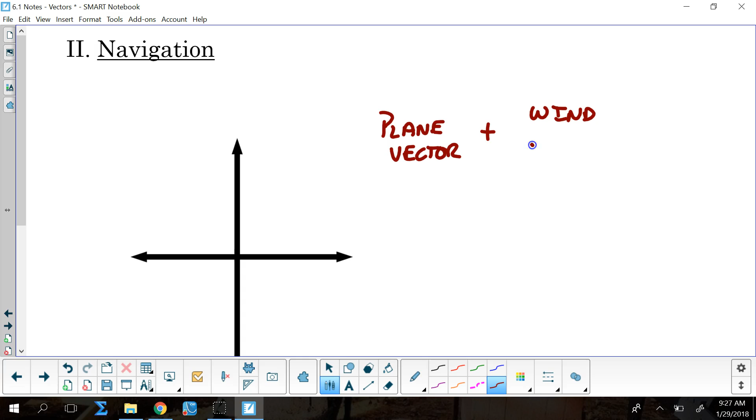Either way, in terms of vectors, the plane's vector plus the wind vector is going to equal my actual vector. So whatever the plane is doing plus whatever the wind is doing is going to give me what's actually going on.

And sometimes, like you guys were coming at a perpendicular wind, so it was pushing me off. What if the wind is from behind? It'll push me straight, but it'll make me go faster. If it's called a headwind, if I'm heading directly into the wind, that's going to slow me down. If it's from the other side, front or back, it could speed me up, it could slow me down, and knock me off course a little bit. But no matter what, we get that.

Now, remember, vectors are magnitude times the cosine of the direction, and magnitude times the sine of the direction, right? Okay, so that's one thing we've got to remember, because we're going to say the plane is heading in this direction at this speed. Magnitude is speed.

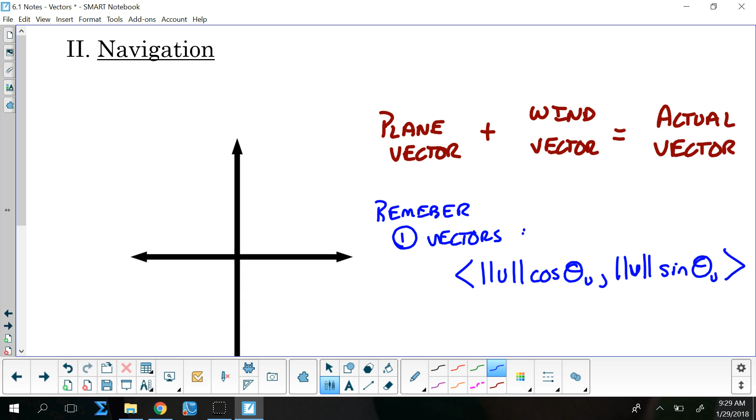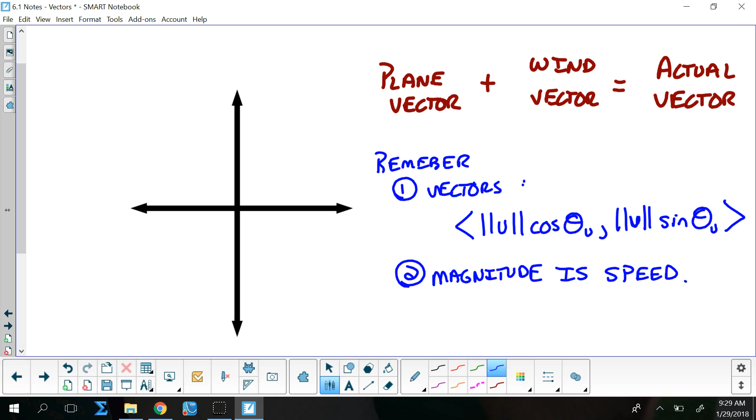Okay, so we're going to have to find vectors. Here's the downfall with the finding vectors part, in directions.

We'll put directions in red. North is 0 degrees, right? East is how many degrees? 90 degrees. South is 180 degrees, and west is 270 degrees.

Now that's direction. What about trig? What's east in trig angles? 0. What's north in trig angles? That one's 90, right? What's west in trig angles? That's 180. And what's south in trig?

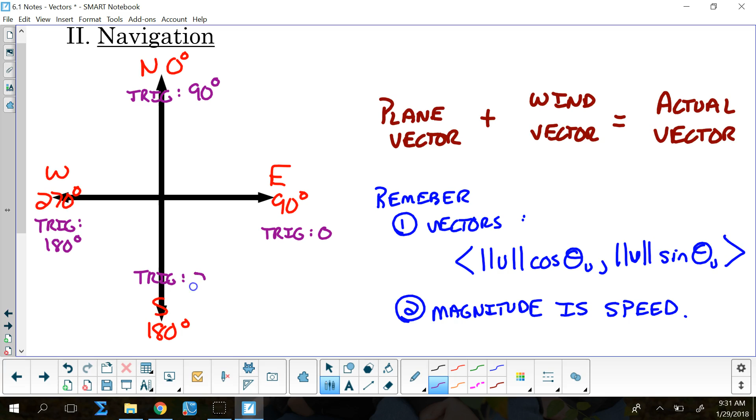That's 270. Do you see the problem? Why is that an issue that I brought forth? Why is that going to be an issue? Because you're using trig functions. Because I'm using trig functions.

So to find my vectors, these are trig angles. If I'm going to use magnitude times the cosine and magnitude times the sine, those have to be in trig angles. So it's like the song we played before school today, the homeroom walk-up song.

It's the circle of life. So we're going to start with a bearing or a direction angle. We're going to switch it over first into a trig angle. Then we're going to find our vectors in trig. Then from that, we're going to find the things that we need. And what we need is a direction in the end, so we're going to come back to a direction angle. It's a lot of logic, but you can handle it.

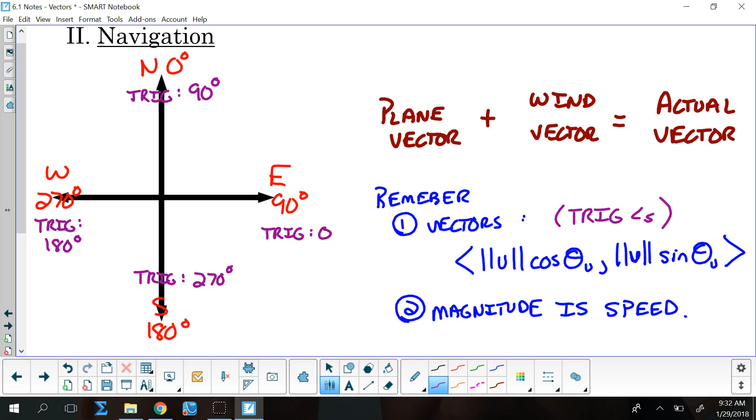So that's the couple of things we have to remember. Let's talk here about a plane flying at an airspeed of 450 miles an hour, bearing 150 degrees. The wind is blowing at a bearing of 60 degrees at a velocity of 50 miles per hour. What is the true course and ground speed of the plane?

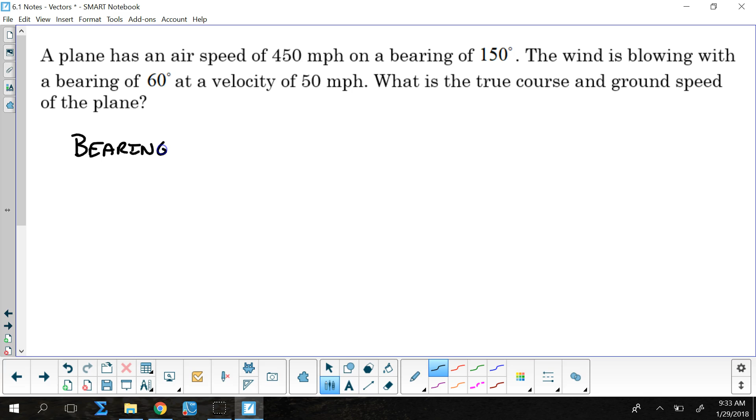Okay, so there it is. So let's first talk bearing. Let's talk the bearing of the plane and of the wind.

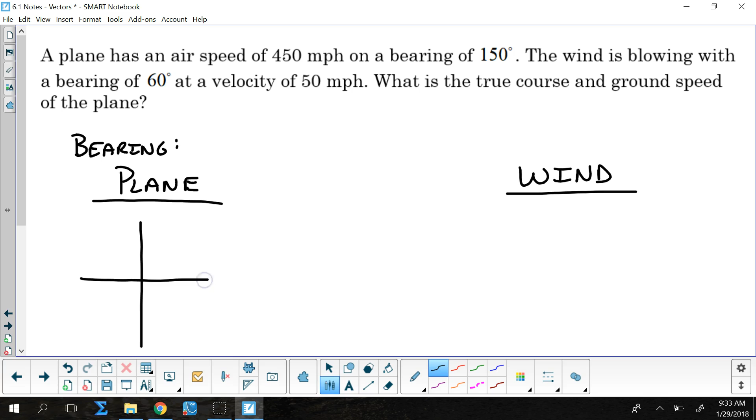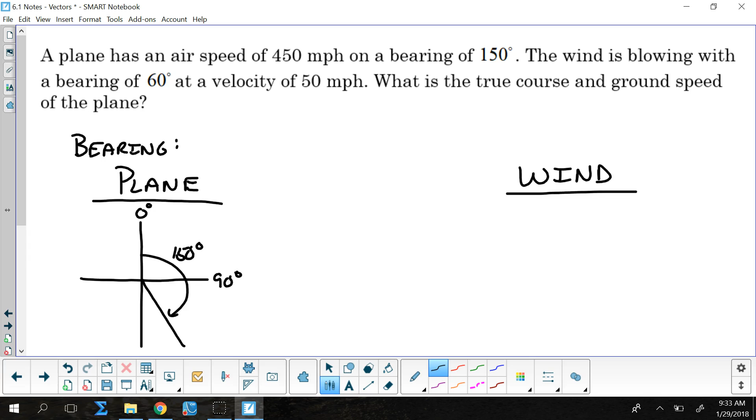So the plane has an airspeed of 450 miles an hour and a bearing of 150. Well, 0 degrees is here, 90 degrees is there, so that would put me at 150 degrees right there, correct? Yes? Okay, what is that in terms of trig?

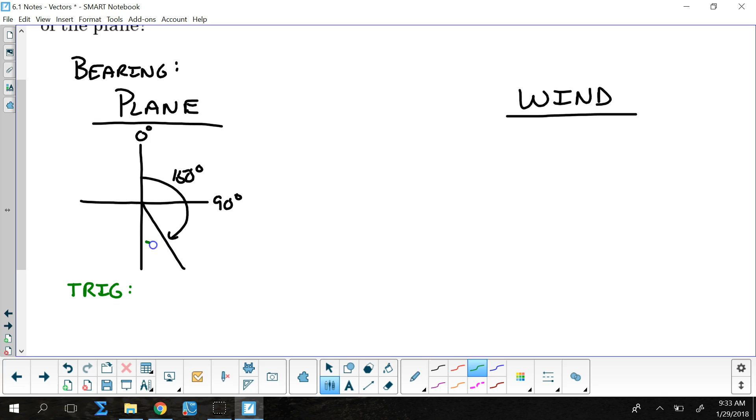That's 150. That's 30. So my trig angle would be how much? Here's 90. Here's 180. Here's 270. I got to go 30 more. So my trig angle is 300 degrees.

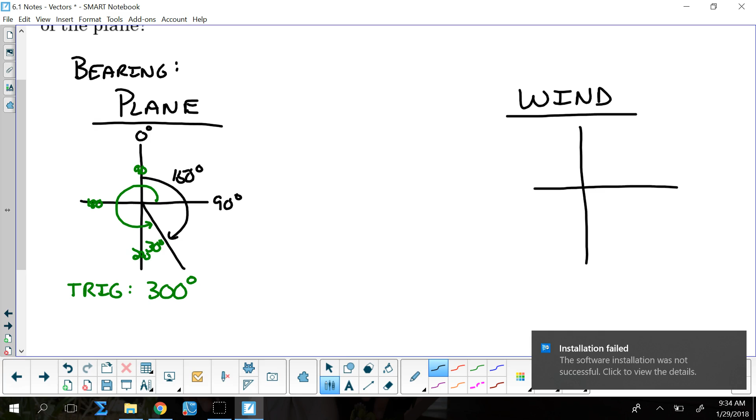Hey now. Okay, then, now we go over to our wind. And our wind is bearing 60 degrees, correct? So that means it is going here.

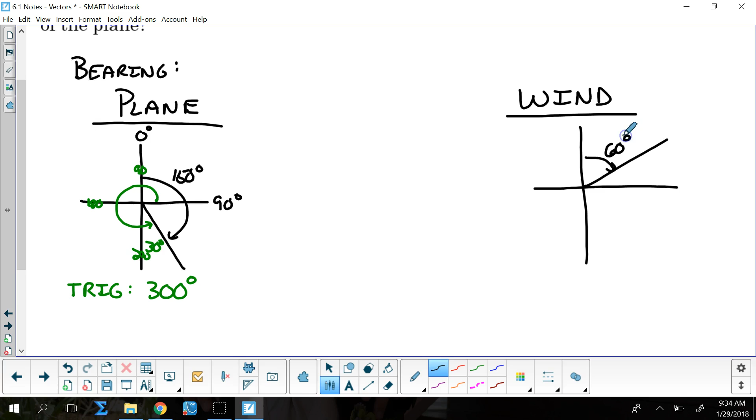What is my trig angle? What is my trig angle? 30 degrees. Does everybody understand that switch over first?

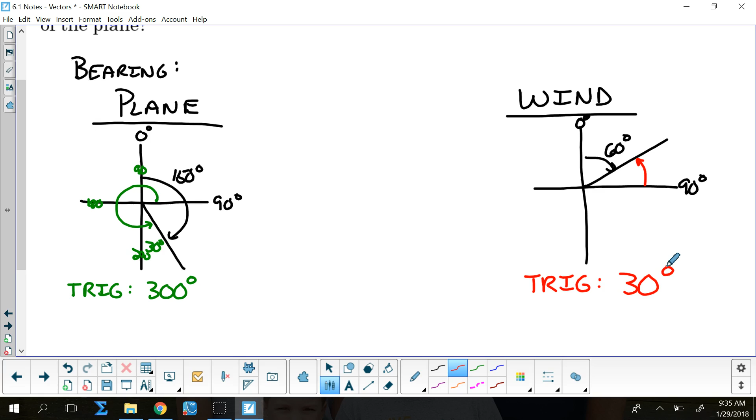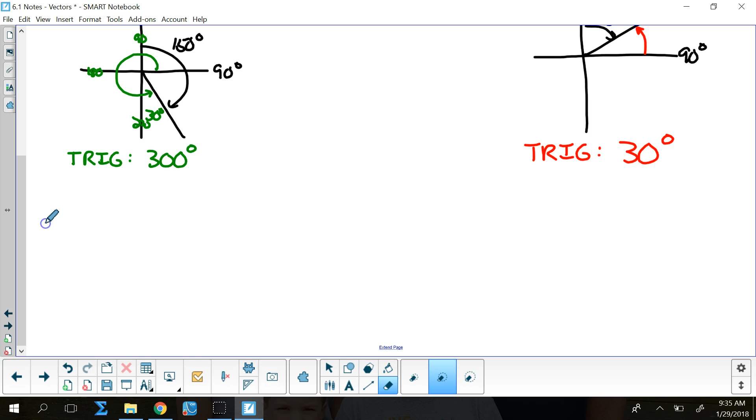Okay, so now we can find the plane's vector. Oops, wrong color, plane was in green. Now we can find the plane's vector. It is going to be, what was the plane flying at? 450? 450 miles times the cosine of 300 degrees and 450 times the sine of 300 degrees.

Give you guys a second to calculate those out. First one, what did you get? 225. Second one, what did you get? Negative 389.711. Yep, okay, all right.

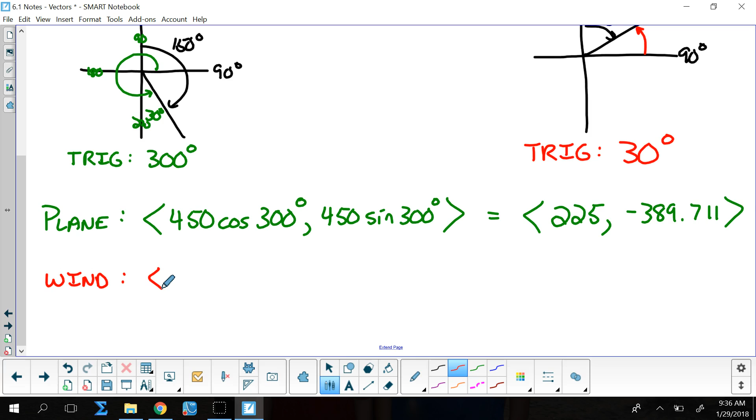Now we need to find the wind. The wind is blowing at 50 miles an hour with a trig angle of 30 degrees. So I get those two, 43.3 and 25 for my wind's vector.

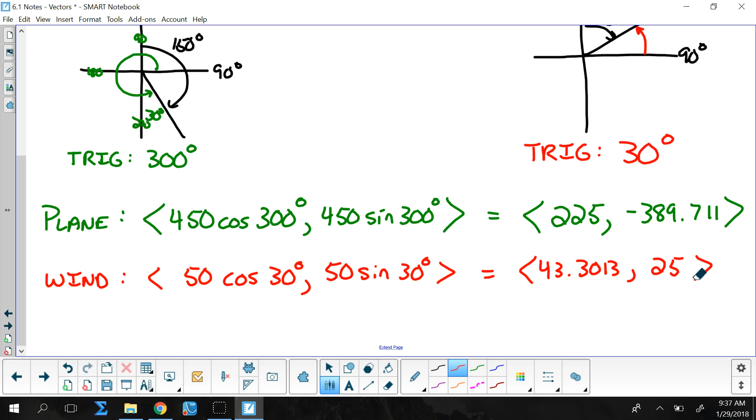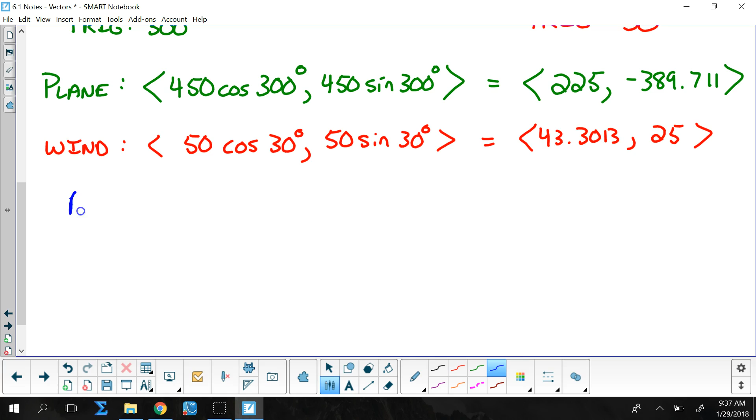Now my actual velocity and direction is going to be what the plane is doing plus what the wind is doing. If this were a ship, my actual direction would be what the ship is doing plus what the current is doing, okay? So I have to add those two together.

So that's going to be 225 plus 43.3 is going to be 268.3013. Negative 389.711 plus 25 is going to be negative 364.711. So that is what the plane is actually truly doing, the vector that it is.

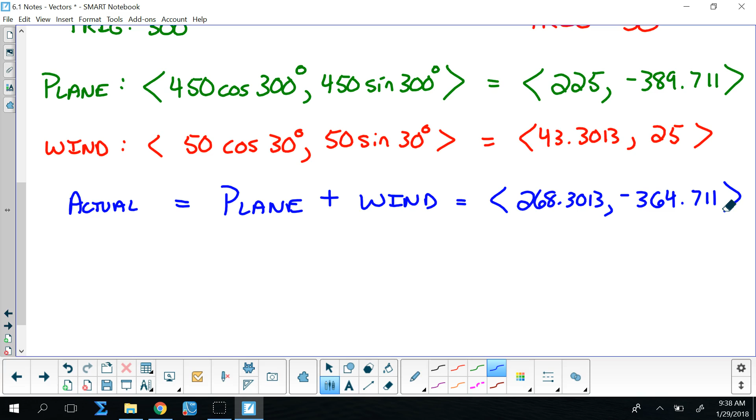From that now, I can find what the plane's magnitude is, because magnitude is speed. So the actual speed is going to be 268.3013 square that, add that to negative 364.711 square that, and take the square root of that sum. So that gives me an actual speed here of 452.769 miles per hour.

To find my reference angle, I take the inverse tangent of 364.711 over 268.3013, dropping that negative sign. And that gives me a reference angle of 53.6598 degrees.

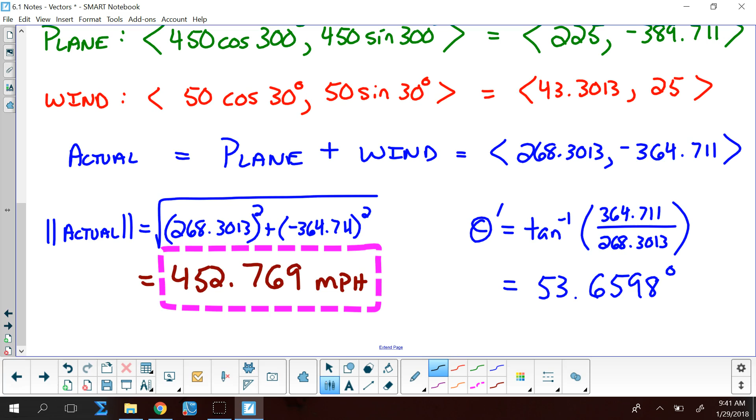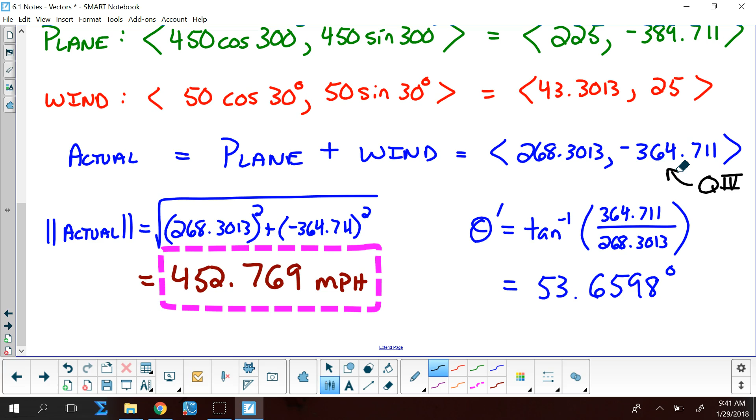My question to you is, which quadrant is my actual plane vector in? Quadrant 4. So this vector is a quadrant 4 vector. Now, thinking about quadrant 4, that means I'm somewhere down in this direction.

Now, switching back to bearing. What bearing, or how would I find the bearing of a quadrant 4 angle? For trig, it would be 360 minus the reference angle. But for bearing, remember 0 is here, 90 is here, and down here is theta prime, so I'm going to go with 90 plus theta prime.

So my actual bearing here is going to be 143.6598 degrees. I could have first found the trig angle and then switched that over to a bearing, but there's no need. We can jump right over that step and go right to our actual bearing.

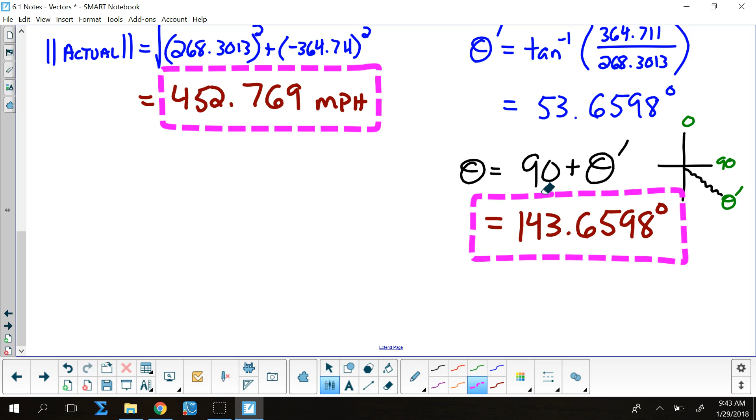What I would like you to do now is try this next word problem. We are given two different parts: what the plane started out doing, and what the resultant velocity is, so that's its actual velocity.

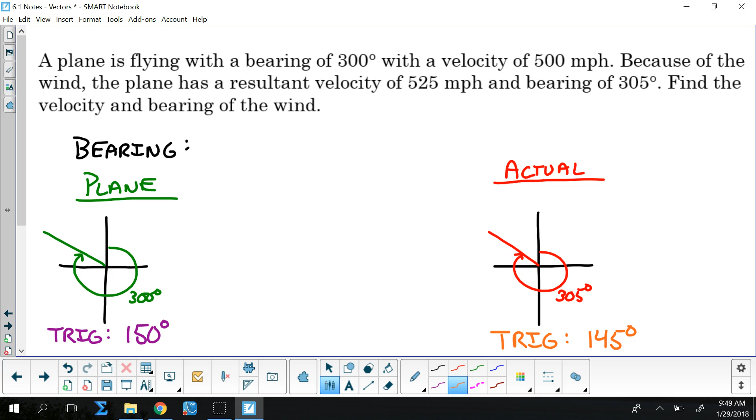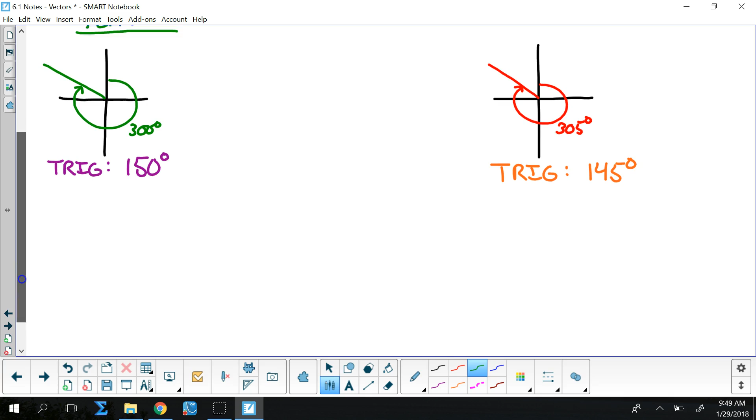So my bearing of what the plane was doing gives me a trig angle of 150 degrees. The resultant, the actual, gives me a trig angle of 145 degrees. So my plane is flying at 500 miles an hour, so that's going to be 500 times the cosine of 150 degrees and 500 times the sine of 150 degrees.

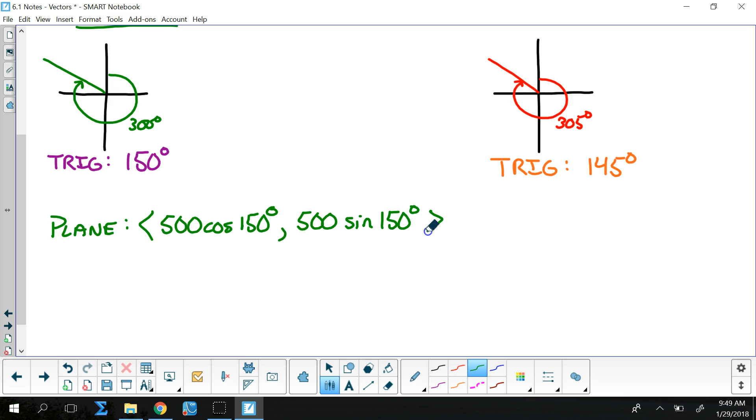So that's going to end up being negative 433.013 and 250.

Then my actual is going to be 525 miles per hour with a cosine of 145 degrees and 525 times the sine of 145 degrees, which is going to be negative 430.055 and 301.128.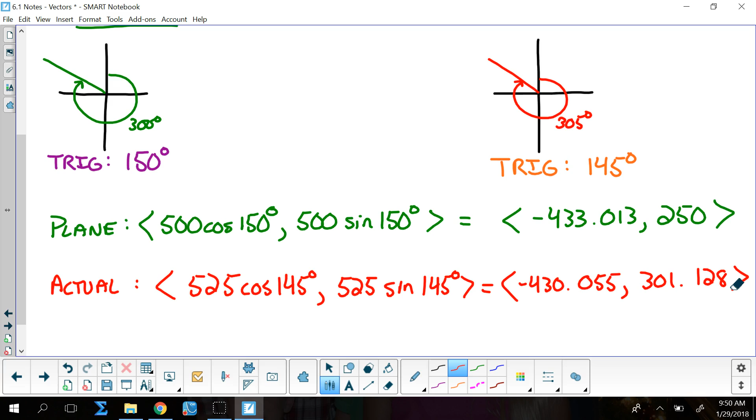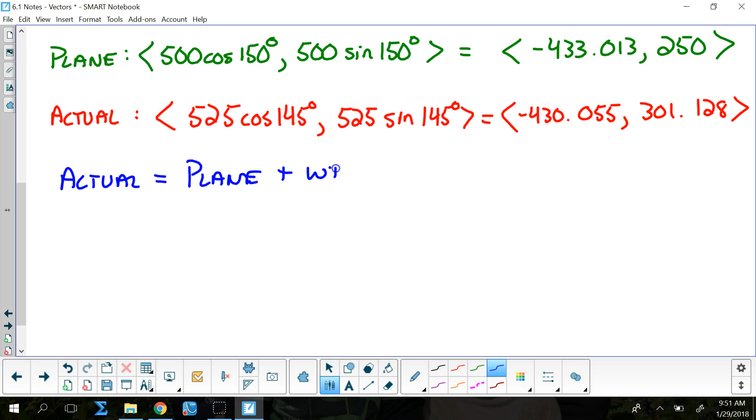So now my actual is going to equal the plane plus the wind, right? Which means my wind then would be the actual minus the plane. So that's going to be red minus green.

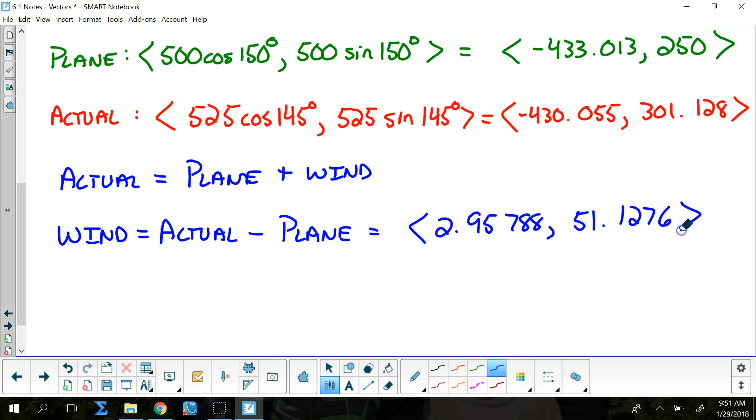Red minus green gives me 2.95788 and 51.1276 there. So that's the vector that I then need to work off of, so I need to base everything off of that.

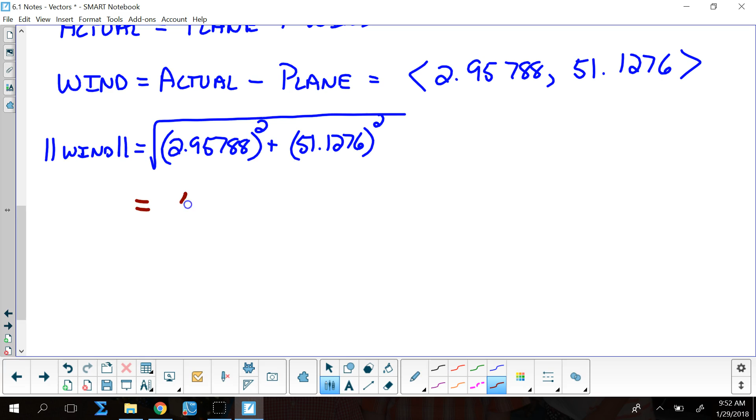So the magnitude of my wind is going to be 2.95788 squared plus 51.1276 squared, and I'm going to take the square root of that. So that gives me my actual wind velocity at 51.2131 miles per hour. You might be off by just a little bit because you rounded; I didn't round when I was doing my calculations.

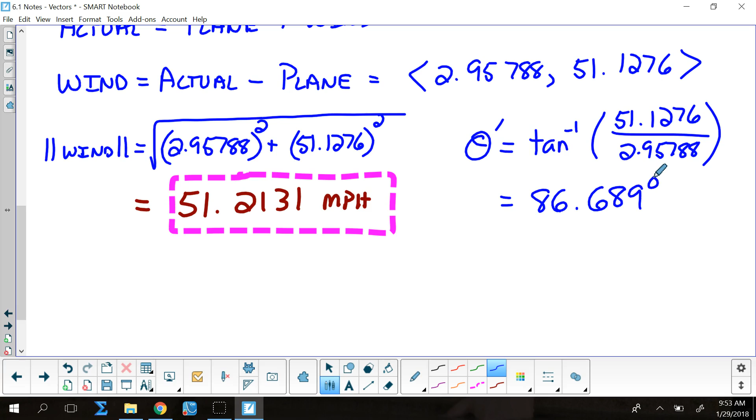Then I need to find my reference angle. That's going to be the inverse tangent of 51.1276 all over 2.95788. That gives me a reference angle of 86.689 degrees. I'm in quadrant number 1, correct?

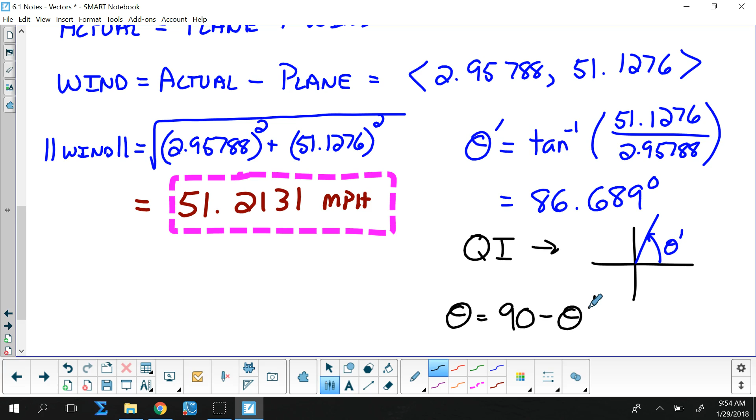This is a quadrant 1 vector, so that gives me an 86 degree reference angle. I need to find the bearing of that. So my bearing in quadrant number 1, theta, is going to be 90 minus my reference angle, because I want just the piece that's left over.

And when I do that, 90 minus theta prime, I get 3.31103 degrees.